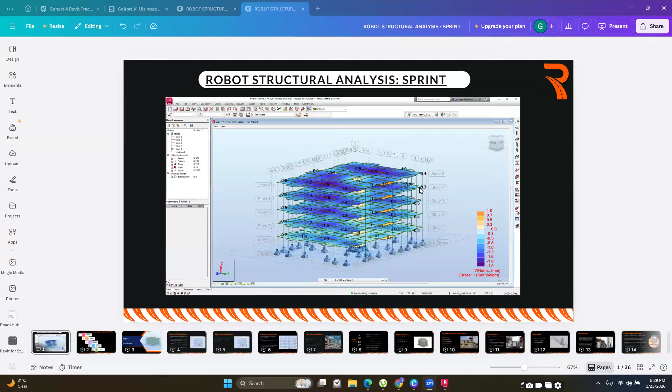So today is going to be the very first day of our sprint, and we are going to start by giving you a general flow of the sprint. We have 5 steps that we would want to cover with you. The first one is to introduce you to structural design, and for the sprint we are going to be focusing on RC design. I'm saying introduction because I'm assuming we are new to design, especially with the software. We are all new to the design, but we have some background information from our undergraduate studies.

So after the introduction, we are going to go into modeling, and in the modeling phase we are going to be majorly using the software.

From the modeling, we are going to go into loads and load combinations, then analysis and verification, and then production of design reports. For the very first 2 steps, we are going to do today. For the last 3 steps, that is 3, 4, and 5, we are going to focus on tomorrow evening. So if you're free tomorrow evening, please feel free to join us as well.

Let's get started. I will start with introducing our Robot Structural Analysis software. It's a very beautiful software, one that I've grown to love. I know most of us have probably not interacted with it, and for those who have tried to learn it on their own, may have encountered a lot of challenges with it, and most people end up not taking it up. But it's a very, very good software, and it is quite versatile. I think it's one of the most versatile tools that you're going to find out here.

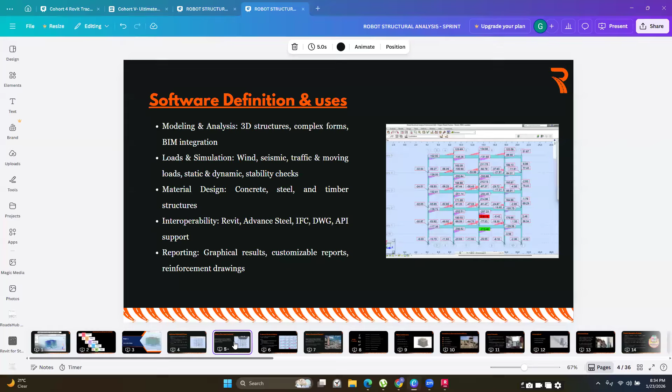So majorly that is the software, and as I said, it's very, very versatile or dynamic, and you can use it for the design of so many types of structures. After that, I'm going to go into the basics of what we are going to be doing, focusing on what we did in our undergraduate studies.

At this point, I think we are all on the same page that we are here in the sprint to design an RC structure, that is a reinforced concrete structure. The purpose of designing is so that you can get information that is going to be used in the construction phase of your structure. But even before you get to design, you need to understand what the design typically is and what the analysis is.

Analysis is what comes before design. In analysis, you are trying to predict how your structure is going to behave when it is exposed to the various loads that you anticipate it to be exposed to in the design life. So here you're talking about the loads that your structure is going to be exposed to - you have your wind loads, you have your dead loads, you have your live loads. They are all going to have an impact on your structure.

From basic physics, you know that for every action, there's always a reaction. Basically, that's what is built on before we even get to determining how the members behave. So if you have a load, you need your structure to be able to support that load, and that is what we find out in the analysis.

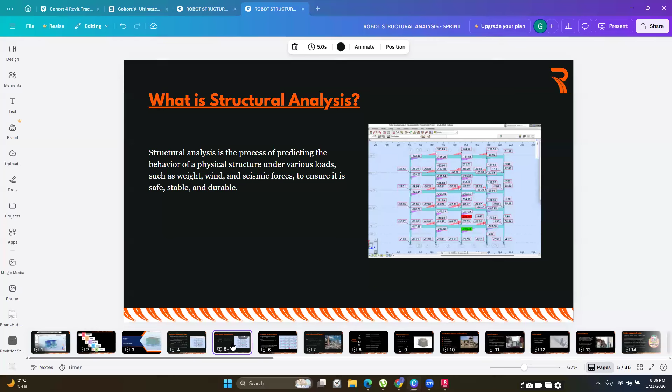So we get to find out, for the live loads that we are modeling on our structure, what moments are they going to cause? What are the shear forces that are going to be generated from those loads? Once we identify those loads and get to know how our structure behaves, we can move into the design phase. So in structural analysis, you have identified the internal forces, and you can now tell the kind of deformations and displacements that your structure is going to have.

Then from there, you can now move to design. And in design, you are going to be identifying the appropriate sizes and quantities of reinforcement. So you are going to be doing this.

So before you do your analysis, you have made a conceptual model. You say that for this span, you probably need a beam that is this deep and has this width. So in the design phase, you're making sure that cross section is actually appropriate.

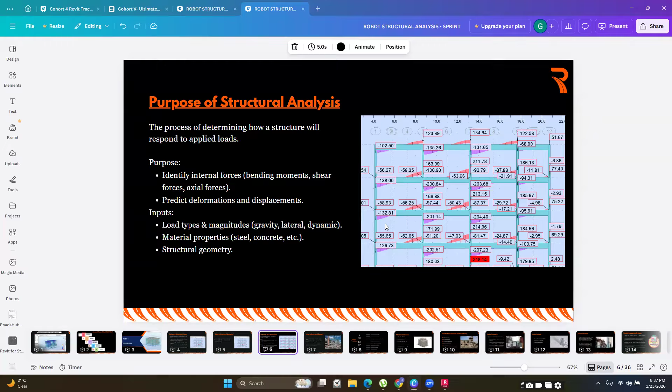And then if it is appropriate, what is the quantity of steel required for tension, for compression if it is going to face compression, and also the number of stirrups and sizes of bars required for the shear forces that arise from the structural analysis. And then it is that information from the design that is going to be used in the detailing bit of the design process.

So this is just to repeat what we have said. Structural design is the process of determining a reliable structural system, selection of suitable materials, and determination of optimum member sizes for the structure to be built. So at this point, you have done your analysis, you can quantify the internal forces, you can quantify the moments.

So at this point, you just want to know what are the optimum member sizes, what are the appropriate materials. Do you need class 25? Do you need class 30 for your concrete? This is what you get to determine in this structural design phase. And the goal of structural design is to ensure that your structure will perform satisfactorily during its design life.

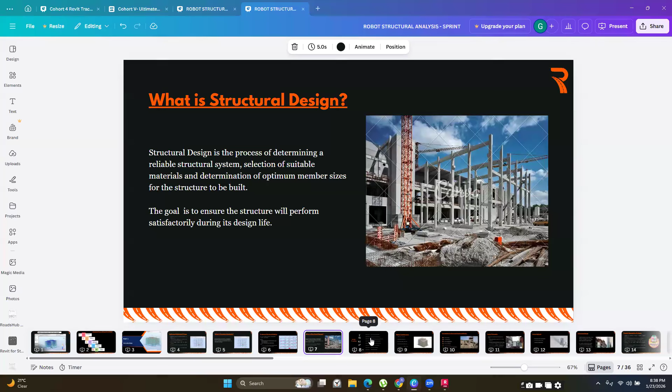But before we even talk about the design procedure, I'd like to talk a little bit about concrete. So we know reinforced concrete consists of two materials. It consists of concrete, that is the cement, the fine aggregate, and the coarse aggregate, and it also consists of steel bars. Concrete in itself is good in compressive forces, it can withstand high compressive stresses, whereas the steel bars can withstand high tensile stresses, and it is also quite ductile. So these two materials, when combined, form a very formidable building material that we call reinforced concrete.

And this, I think, is one of the most, if not the most, common building materials. It's common because of its affordability and how easy it is to use. You can see, even from the areas we stay in, there are buildings that have not been engineered and they still exist. That's how easy it is to use reinforced concrete. It's one of the easiest materials to use, and that is why it is the most common use.

So with that, we are now going to go into the design phase, and in the design we have several aims of design. Before you start any procedure, you definitely have something you are aiming for. So the whole purpose of you taking your calculator, the whole purpose of modeling the structure in a finite element analysis software is because, number one, you want to ensure that your structure is going to be safe and reliable. As the engineer, you're tasked with ensuring the structure is not going to fail under the ultimate limit loads it's going to face.

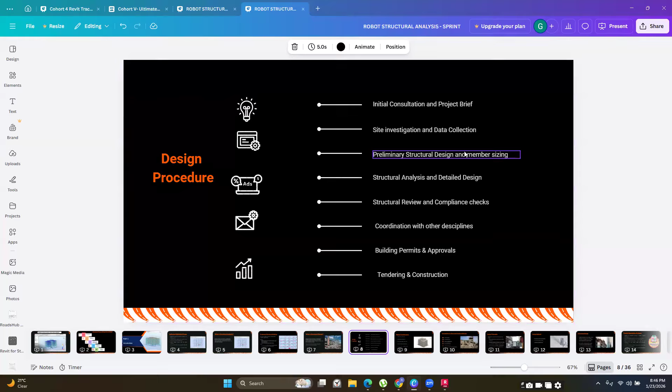From here, I'd like to go into the design procedure of how personally I approach design. This is not cast in stone, you don't have to approach it in the same manner, and it would change or alter from project to project. If you have any additions to any steps here, I'd like to see that in the chat box so we can all learn from each other. If there's something you want to add or remove, we would love to see it in the chat box. So this is how I approach structural design.

The first thing is the initial consultation with the client and project brief. Here is where you get to understand the project itself. Remember, when structures or projects are coming up, you are not working alone, you are working with other professionals such as the architects, the quantity surveyors, geotechnical engineers, and others.

So for you to get to understand the project, you have to be in communication with them. You have to get more information from them. In this initial stage, I always tell our participants, it's for you to listen, to get to understand how they intend to use the structure.

You might go to a consultation with the client with your own beliefs or how you approach your design. You are used to having buildings with permanent walls, or permanently partitioned. That is, from the architectural drawing, you know where your masonry walls are going to be placed, but from the initial consultation with a client, you get to understand that they do not want any partitions. They want just an open space.

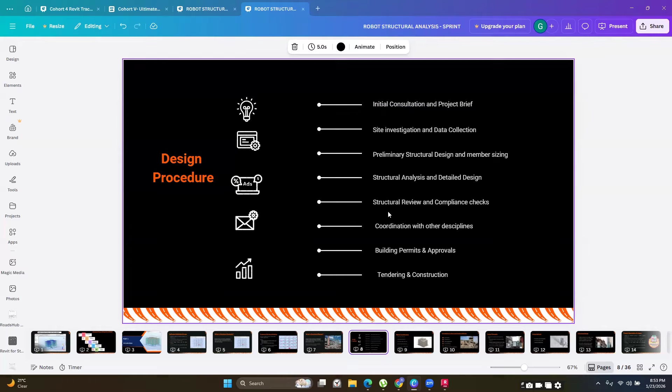So we can now move to design considerations. And what you're going to notice in the design considerations I have listed is they will majorly come from the first two stages of the procedure. So the design considerations are basically what you're going to understand from the briefing with your architect, with the client, and also from the data and investigation you did.

Some of the things you may want to consider are the structural use and function of the structure, the environmental conditions, the expected durability and fire safety, constructability and maintenance, and economic and sustainability factors.

So you can see that the structural use and function are going to affect aspects such as loading your structures. If a structure is to be categorized as a residential building, it is going to have different loads from something categorized as a commercial building.

Then the environmental conditions would affect the cover conditions for your members, and also the loads you're going to be using for simulating your winds, and also if it is in an area considered seismic. Those are some of the things you'd have to consider at this point.

Then the expected durability and fire safety. Different buildings will have different expected durability and fire safety features. So if you're doing a structure like a hospital or a school, they're going to have a higher expected durability in matters of fire safety. But if you are doing the normal residential buildings, they may have a smaller expected durability that could be even 45 minutes or an hour. So those are some of the things you have to consider.

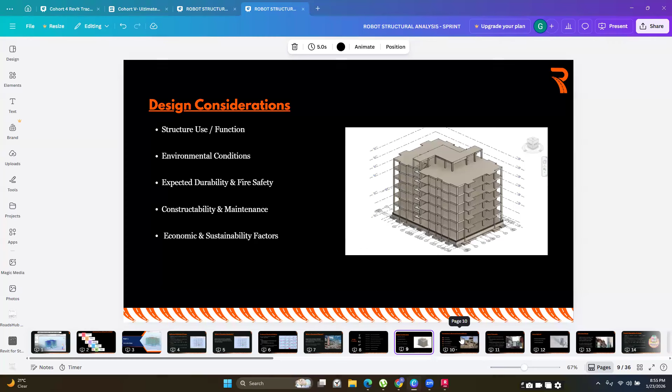And then once you have these design considerations, you can move to design itself. But as we approach design, we have to consider that there is always going to be uncertainties when it comes to design. We may, as engineers, want to be as perfect as we can, want to simulate our loads as perfectly as possible, but most of the time it is impossible to do that. And this is why we have to consider the uncertainties involved in structural analysis and design.

So these uncertainties may arise due to load variations, load distribution, analysis simplification, structural behavior, and construction errors majorly. When we talk about load variations, we are suggesting that you may consider the typical live loads that you expect certain structures to be exposed to. So if you are designing a residential building and you consider a live load of around 2 kilonewtons per meter squared, you'd be well within range. But sometimes you may find your structure exceeding those expected loads.

I think those close to the East African community remember there was a picture going around of a steel tank that had a lot of people scale it to be able to see the proceedings during the burial of the late Raila Odinga. I hope you can remember that tank or that stand. We are sure that no one had anticipated that tank would be exposed to such magnitudes, but during the analysis and design, probably the method used had some way of accounting for such an occurrence, and that's why it was able to safely withstand those loads.

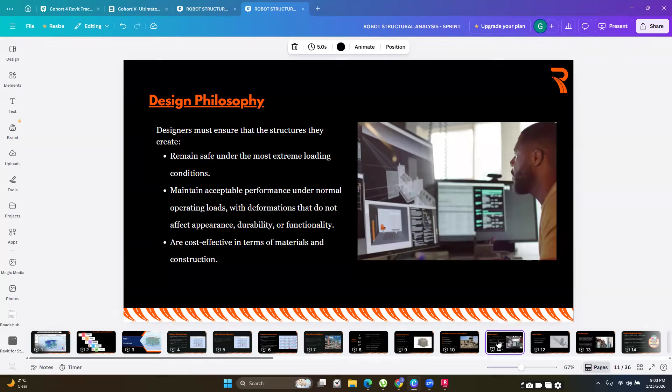Then we are going to approach the design methods, which are majorly tied to the uncertainties in structural analysis and design. So we have the permissible stress method, also called the modular or elastic method.

So in this one, how these design methods or design philosophies - they are basically fundamental sets of principles, assumptions, and approaches that guide the planning, analyzing, and design of structures. They are there to ensure that our structures are safe and durable, and they are majorly tied to the uncertainties that we are likely to face during design and construction.

So there are three main approaches that we have: the permissible stress method, the load factor method, and the limit state method.

The permissible stress method is also often referred to as the modular method or the elastic method. In this one, to cater for uncertainties, stresses acting on a structure are not allowed to exceed a certain proportion of the yield stress. The yield stress is the point at which a material stops behaving elastically - that is, an increase in strain stops causing an increase in stress in the material.

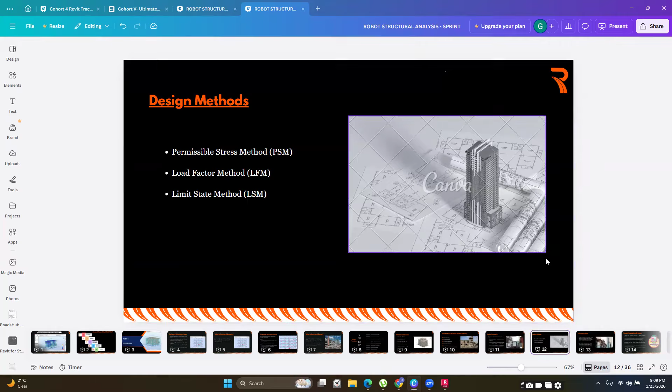Okay, so I don't want to bore you with a lot of theory. I want to move to a more practical sense, but at least now we have some background and can approach the design. So I will go to the project information and what you are going to be doing - the scope for this particular sprint.

We are going to start with interpreting the architectural drawings, covering what we had in the first stage of our design process. At this point, we are going to be concerned with understanding the architectural project and how it is going to influence where we place our structural elements.

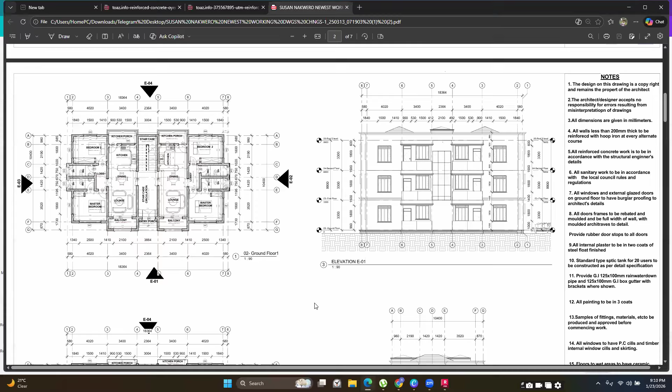So what I'm going to do is open up the architectural file on my end. I hope you can see it - if you can make out anything from my screen at this point, please type a one. If you can see the architectural file and make out the dimensions, probably how the space has been utilized, please type a one.

Super, we can see it clearly. So before I proceed, at this point we want to do our preliminary sizing and get an understanding of how we are going to approach our design.

I just want a few volunteers, probably 2 or 3. Let me hear what you understand, and from what we have here, how we should approach our column modeling and placing our beams. Okay, take it up. Anyone, whoever goes first, just to save on time.

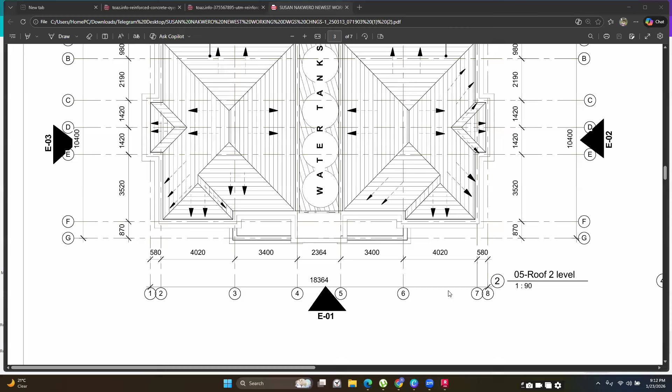Feel free to share with us, we want to hear from you. What can you see on the screen, and what do you think we should do, especially with regards to modeling our columns and placing our beams? Also consider this is a three-story structure, so have that in consideration. Let me hear what your thoughts are.

Anyone willing to go or give it a trial? Boss, please take it over. Please go.

Right, thank you so much for guiding us through this. I think at this point you want to look at the building in terms of what is the arrangement of the rooms that the architect has given you.

Look at the ground floor, then the first floor, depending on how many floors are coming on top, and see if you put a column from down, does it go through, can it be linear to the last floor up? Or at some point does it end somewhere? Also consider the arrangement of columns and beams - is there going to be a column randomly placed in the middle of a certain bedroom?

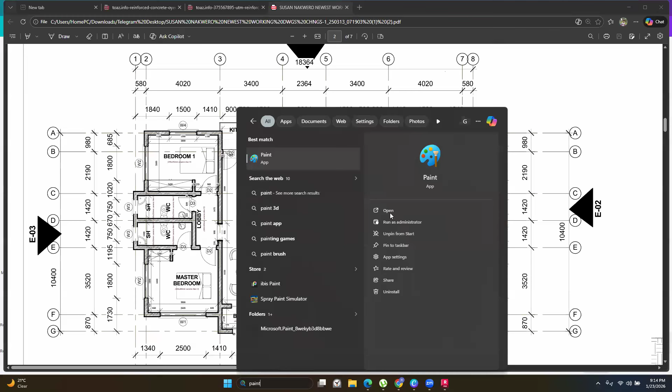Someone else, one more person, and then I'll proceed. Okay, good evening. Good evening, Bright. Yes, am I audible? Yes, you are. So for me, the way I usually approach this, the first thing I do is...

I clean my drawing using AutoCAD. I'll take the ground floor, then the first floor, then the second floor. So you superimpose the first floor on top of the ground floor, then superimpose the second floor on top of the first floor, and if there is a third floor or an eaves layout, you superimpose it on the second floor layout.

So from there, I will just take my walls - you clean out the walls and leave the openings. So when I'm modeling, I'll be looking at where I've got openings; that's where I'll be putting my beams, then checking the spacings. I then align my columns depending on the spacings that I'll be having. That's how I usually approach it.

Super, thank you. All right, thank you, that's how you're going to approach it. But in the interest of time, we're just going to use one floor to place our columns and beams, so we are going to get started.

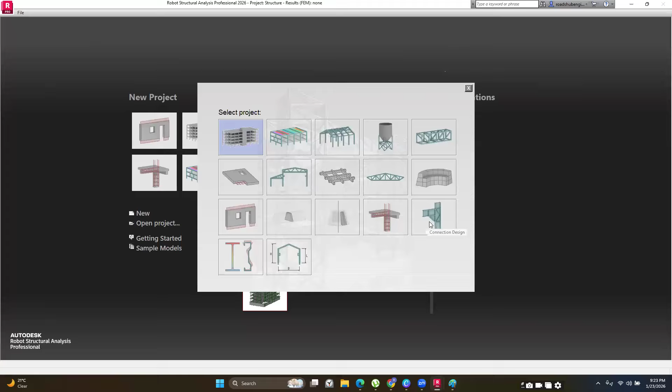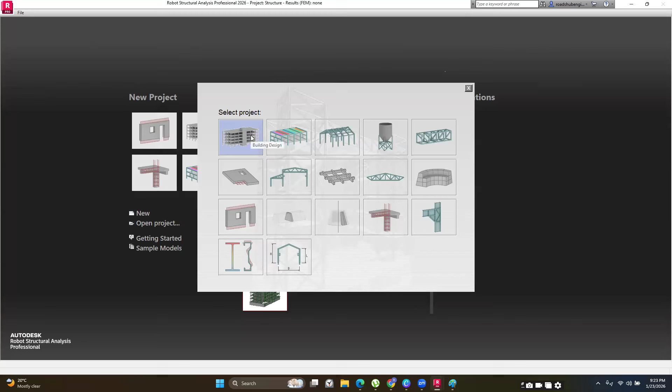So for now, we are going to be focusing on coming up with a 3D model of an RC structure. So to do that, I'm just going to click on New. Then I'm going to go with the first template. You're going to find that this is the template you're going to be majorly using. So I just click on New, then select the Building Design template.

Then once it opens up, this is how the user interface looks like. The user interface with Robot is very simple. It doesn't have a lot going on. You can see I do not have a lot of tools to go with, and you're going to realize that everything is quite accessible. All right, so this is how the user interface looks like.

At the very top, I hope you can follow my cursor. You can see the version of Robot you are using, the name of the project. So I'm meant to name it, and it has gone with the default name, that is project structure. And then on the right, after the name of the project, you can see the status of your analysis. Once you do your analysis, the status of your analysis is going to be available. But if you are yet to do your analysis, the analysis is going to be none.

And then on the right, you can see the email I've signed into the software with. And then you also have access to the Autodesk Store and Autodesk Help. Then after that, we have the ribbon.

Basically, the ribbon is the collection of the tools that you're going to be using to model your structures. When taking our participants through working with the ribbon, I always recommend don't try and cram where the tools are. Just try and understand how the software has been organized. And then as you work more with the software, you're going to just know where they are. It becomes so easy, you don't even have to think about where the tools are. So just don't focus on cramming where the tools are. Just try and understand how the user interface has been arranged.

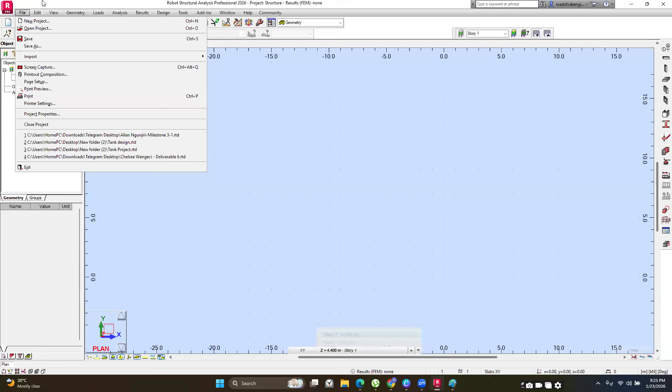So to the left, we have File. This is basically where you open a new project, where you save, etc. So this is where you have File. And then we have Edit, and Edit does what Edit essentially means — we have undo, redo. If you want to make changes to something that you've modeled, you do it in the Edit tab.

Then we have the View, and the Views basically majorly affect how you view your elements. When you are working with Robot, it's quite sensitive when you're snapping. So if you look at my screen, you can see a few dots. If you can see the dots, please type a one. So when you're working with Robot, it's always going to try and snap with these dots. And if you're not aware of that, it is going to bring on a lot of errors down the line.

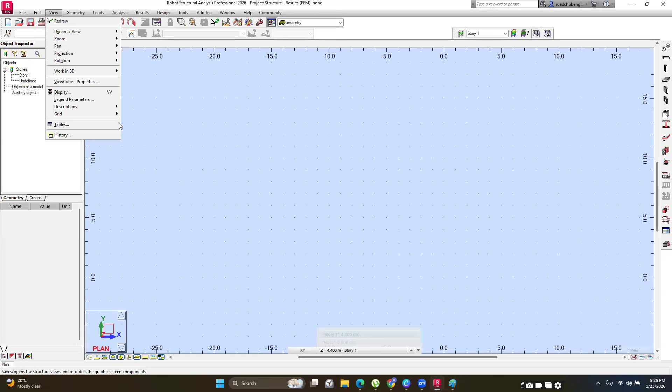You're going to be modeling your structure, and once you get to the analysis phase, you are going to find that some of your panels are overlapping, or some of the columns or beams were not snapped to the nodes that you intended them to snap to. So whenever you open up a project in Robot, I always recommend go to View and then click on Grid. Once you click on Grid, place your cursor here and scroll to turn off grid, then turn them off. Once you do that, you're going to now be in control of where the software snaps to, and it's going to help you be more accurate with your modeling.

Then now from View, we go to Geometry. In Geometry, this is the tab that we're going to be using to come up with our structure. So in the Geometry tab, we can define the structure type.

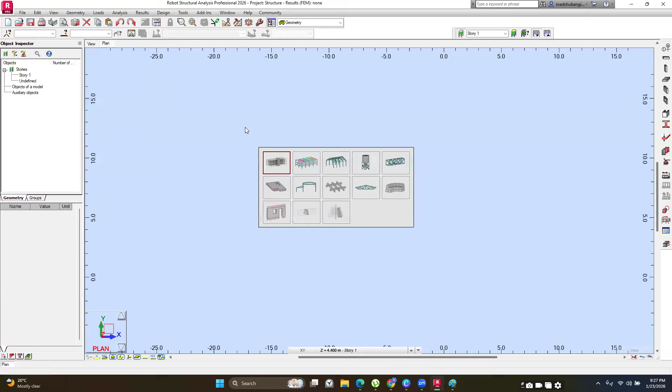Okay, so we can still access the templates from here. If we want to change, you can do it from here. But I'm going to stick with what we had earlier. I'm not going to change it. I'm going to stick with the 3D modeling.

And then after 3D modeling, you can do your axis definition. For those who are new to axes, axes are majorly just a coordinate system. I'd consider them a planar coordinate system, and they assist you in locating your structural members and communicating where they are. When working with the software, it is always easier to model where a grid is.

So when you're working with the software, even if you don't want to have a grid on your detailing, I always recommend you have the grid there and model with it. Then when it comes to the documentation bit of the design process, you can delete it. Okay, so we have that.

Then from the geometry, this is where we access the tools to model our structure. All these tools are accessible via the modeling bar on the right. You can see where I'm hovering with my cursor.

So at the top we have axis definition, and this is the very first tool I have here — it's what enables us to draw the axis. Then we have stories. To define our stories, say the story height, etc., we define it here. You can use these tools here, or access it from this bar as well.

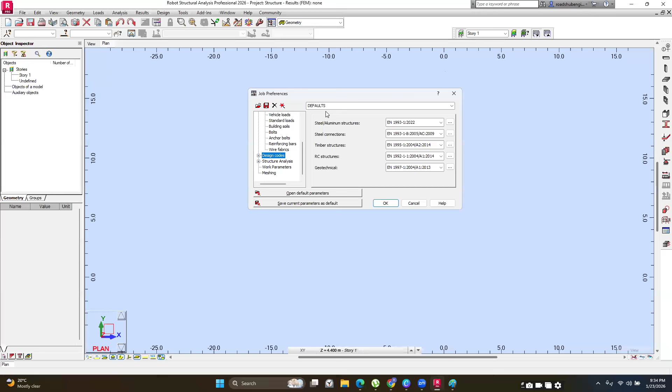Sometimes you may want to change to certain Eurocode annexes so you can design for elements such as shear walls. But since our structure doesn't have any walls, I'm just going to go with the basic Eurocodes. If you want to change them, click on the drop down, then click on more and select the type of code you need, then set it as current. But for now, the Eurocode is sufficient.

Okay, I think we've had enough with that, so we can start the modeling. To start modeling, it's really easy. Before I do that, let me confirm my story heights. I'll go to Structure, Stories, and ensure my story height is what I intend to have. Always do this before you model, because it may be troublesome to change the story height once you do.

You can see the project I had opened up - I was working on a tank, so it had a story height of 4.4 meters. I need to change back to what I expect for a residential project, working with a story height of 3 meters. To do that, it's really easy: I'll select this story and delete it, then go to define manually and change the height to 3 meters. All I need to do is type 3 meters and add it. Then once I have that, just apply.

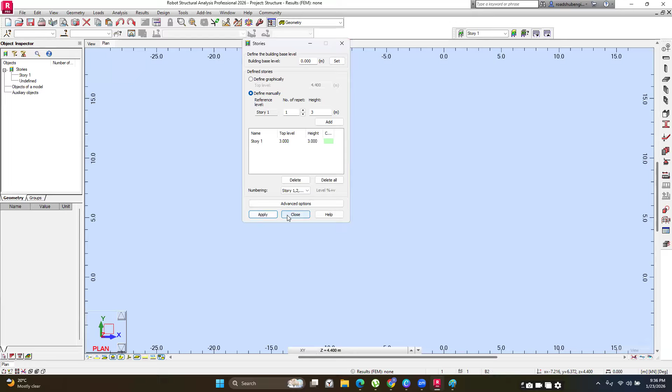This is important because when I place my columns, they're going to follow this height. If I had modeled them with the 4.4 meters, they would be placed with heights of 4.4 meters. Once I click apply and close, I'm going to have this. Then I'll scroll and ensure I'm in story 1. Once I'm here, now we can start creating our grids.

When creating our grids, we may want to follow what the architect has, try to model the grids as he has modeled. But the reality is sometimes you may need additional grids that he did not have. Here you're a bit lucky - probably the structure is quite simple and you have grids at almost every element. But in some instances, you'll find yourself working on projects where you have to introduce new grids.

So we're going to create a few grids here, and it's really easy to do. So to create grids in Robot, this is what you do.

You just go to your modeling bar on the right. You can click on the axis definition or access it by going to geometry. So you can access it either way, but using the modeling bar is easier, so I always recommend going with what is easy.

So select axis definition from here and define your axis. We have three axes: X, Y, and Z.

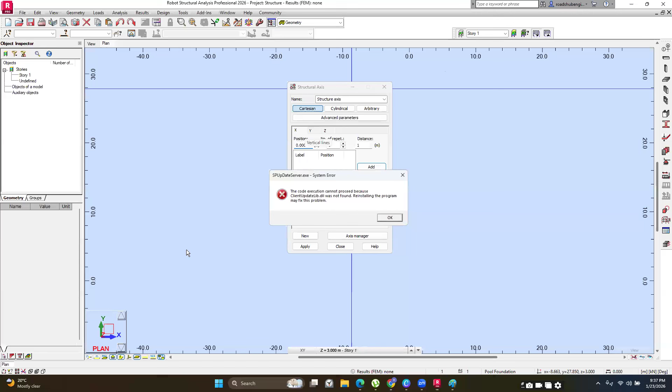If you look at my screen, you have the global axis here. You have Y in this direction and X in this direction. You can see Y is pointing upwards and X is pointing towards the right.

So this is telling you that X in Robot is from left to right, and Y is from bottom to top. So when you want to define axes that are spaced along the X direction, just ensure you're in the X direction, and then start with creating the first axis.

I'm just going to have my distance 0, number of repeats 1, and I'm going to have an axis at position 0, 0. So the position 0, 0 for me is here. This is where my grid 1 is.

Then to place my grid 2, I will enter the distance between grid 1 and grid 2. At this point, I know the distance between the two grids is 0.58 meters.

So what I will do is come here, have the number of repeats as 1, and then enter the distance. My distance here is in meters, so you need to be careful with that. If your distance is in millimeters, always ensure it is in meters.

Otherwise, you may end up modeling a structure that is more than 1,000 meters long, and it's going to give you trouble. You're going to find your members failing and not know why. It's because you are designing beams that are 580 meters long, which doesn't make sense. So always ensure you convert your measurements correctly.

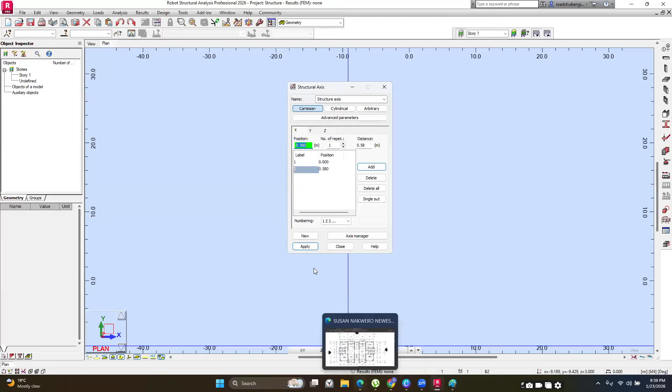So I will have my grid 2 at 0.58 meters from grid 1. Then I'll proceed to create my second grid, 4.02 meters. I just go to the software, in the distance type 4.02, and add it.

Then from there, I'll go to the next grid, that is 3.4 meters, so I'll type 3.4 meters here and add it. Then I have a second grid that is, say, 2.365. I'll type that, 2.365, and add it.

Then after that, I will go again, just reading the distance and typing them in. So I have 3.4 again, I type 3.4 and add it. Then after 3.4, I'm going to have 4.02, add it, and then finally 0.58, and add it.

So I have my grids. Once I'm done in the X direction — this is the X direction, and this is the Y — I'm going to go to my Y direction and place them.

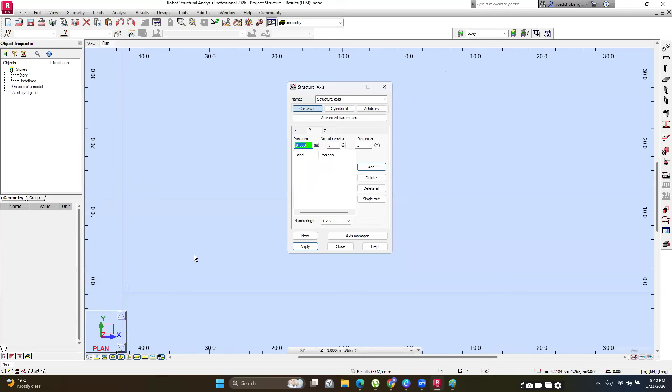My 0 is always going to be at the bottom left. You can see where my 0, 0 is, here. So I'm going to have these as distance 0 and number of repeats as 1, then add it. That is the position of my first grid.

Then I will start from the bottom, going upwards. My first grid is 0.87 meters, so I will have my distance here as 0.87 meters and click on add.

Then from there, I'm going to go to 3.52, add my distance here, 3.52, and add. Then I'm going to add the next grid, 1.42, twice. I click to add 1.42 and add it twice, one, two.

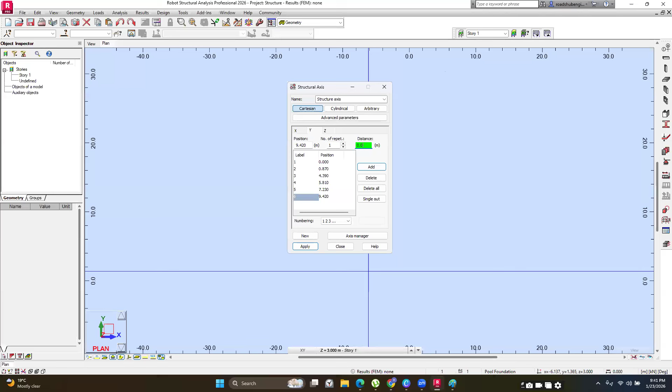Then I'm going to add the second one, 2.19, then 0.98, then add it, then apply. Once you apply, you have your grids.

Something I forgot to mention is that you can change how your grids are numbered. At the moment, you can see all my grids are in numerical figures — the grids along Y are numbered 1 to 7, and the grids numbered left to right are also numerical. Ideally, you want to have one set of grids numbered or ordered alphabetically.

So I'll change the ones along Y to the alphabetical order just to match this. This will change the numbering at the bottom where you have numbering. You can use ABC, enter values, or define them manually. I'll just go with ABC, it's easy. You can apply and close.

And then I have my grids set. So this is what we'll do. We will model columns, and I'll just start on the bottom left. For this structure, I'm just going to start with an assumption of a 200 by 450 millimeter column, and for the interior ones, I will do 200 by 500.

So what I'm going to do at this point is this: I'm just going to explain how I approach orienting the columns. I think it's something that is really important to grasp before you even start placing them.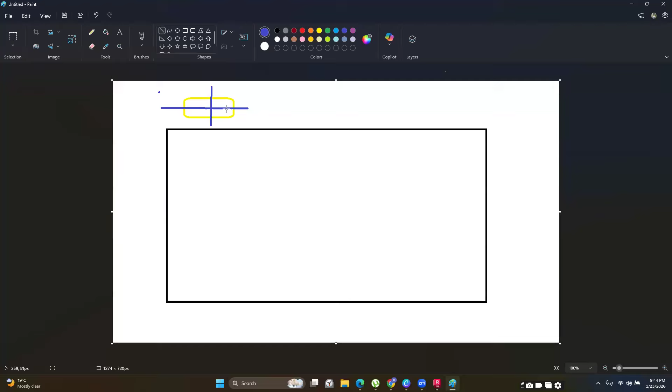So whenever you are doing your preliminary or conceptual modeling, always try to have the longer side be in the same line or parallel to the longer side, so it can ideally resist more bending in this direction. This makes your design a bit more efficient, and you end up requiring less reinforcement in this direction.

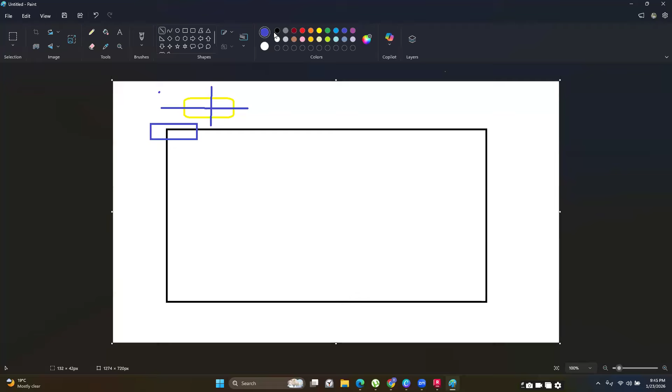This can also be influenced by how the panels have been arranged. Say you're designing for such a point - you have a beam on the left, a beam on the right, and in this direction no other beam. You may expect these 2 beams to behave like a seesaw, so the moments on this beam and this beam, if there's a support here, counteract each other, and you expect minimal net bending in this direction.

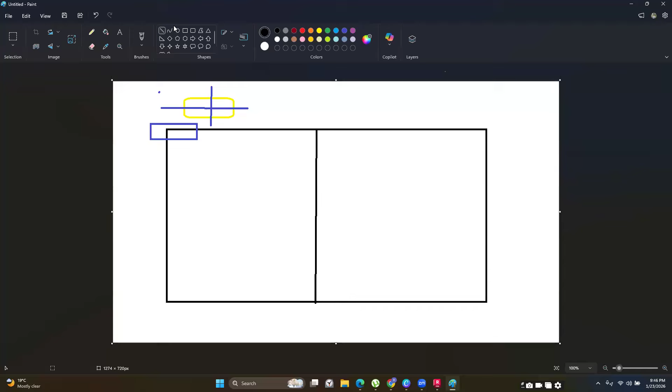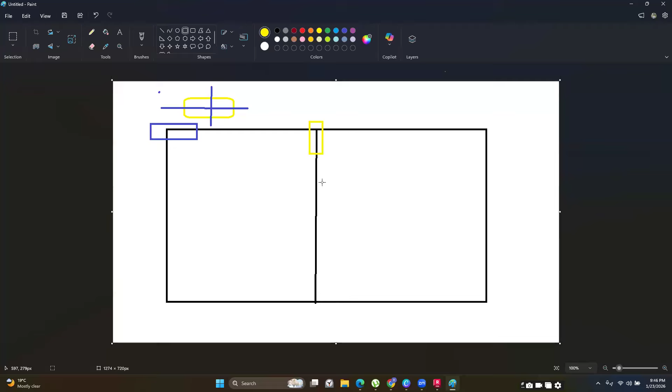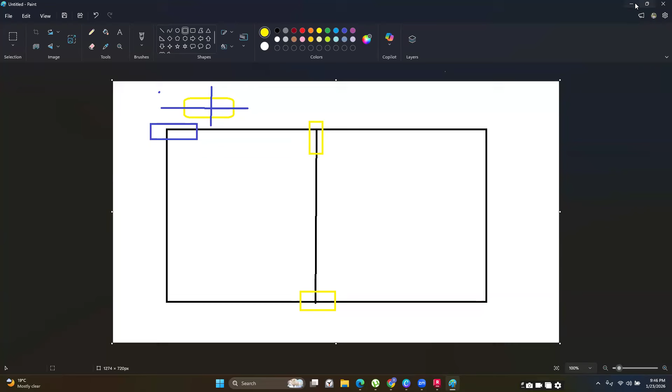So for this case, you may prefer to model your beam with the longer side in this direction. But again, this is not cast in stone - it depends on the scenarios you find yourself in. If there's a door here and a window here, you may not be free to model it this way - you're constrained by the architectural needs and usage of the structure. In that scenario, you may be forced to design it differently. Not that this is wrong, just that this method is a bit more efficient and economical in the design phase. So what we're doing here is just the conceptual design phase.

We are making educated guesses on the sizes of the columns and members we need. From there, tomorrow, we are going to do the design and get the actual sizes. So at this point, we are just doing the preliminary sizing - making an educated guess of what we need.

So we will start with the columns - it's going to be really easy modeling them. To model columns, you go to the modeling bar, and select the columns option. This is the option you select for modeling columns. You left click on the columns, and once you do this, you get this pop-up. The first thing you need to do is select the type of column you want - you can do timber columns, RC columns, or steel columns.

We are doing an RC structure, so I'll go with RC column. Then click on these three dots to define the type of section you need, and give it a label or the name.

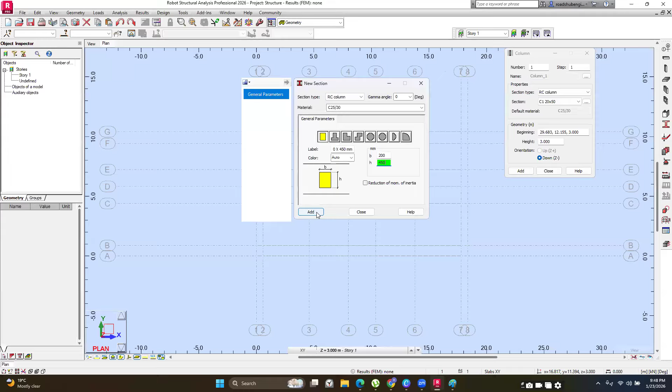I'm going to call it column 1, 200 by 450 millimeters. So in the width, 200, and in the height or depth of the column, 450 millimeters. Then I will click on add and close.

Once I do that, I will just place my columns. So in this panel here, what's the distance here? I expect this is the longer side, so I'll just orient it in this direction here.

Let me look at where this is. This is a second grid, I will place it here. Once I place it here, you're going to notice that my column has not been oriented in the direction I wished for.

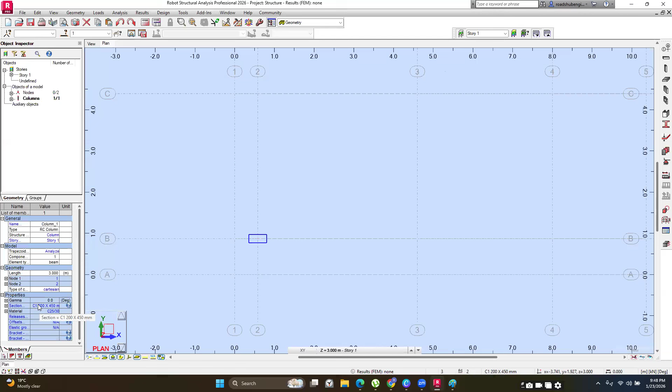So to change the orientation of a column, you just select it, and in the options on the bottom left you can change its orientation. You go to Properties, expand Gamma, and type the degree of rotation, then click somewhere and it's going to be oriented. And that's how you model it.

Once you're done with the first column, you can copy it or model the others. So I'll quickly model the others. For these ones, I will orient them in this direction. I'll place another one here and another one at grid C.

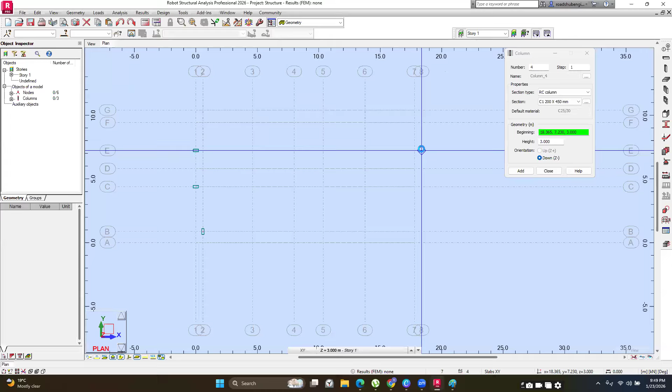It's really easy. You just go to column modeling, then you place it. You place the first one here and the second one here, then I'll do the same thing here and here because they are modeled in the same way.

Just to save on time, I will copy this one. To copy in Robot, you just go to this option here, Edit, and select Copy. So highlight the item you want to copy, then go to Edit and click on Copy.

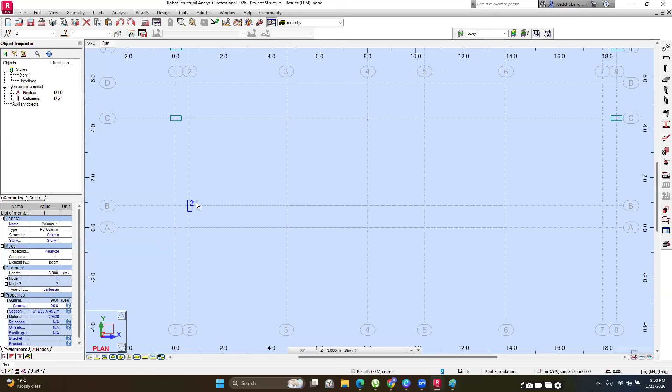Let me go to copy here. So this pop-up appears and then I can copy it. All I need to do is left click on the center of the column and copy it to these other points that I need to place it at. So it's here and it's here.

Okay, so if you look at my structure, there is some form of symmetry, so that's why it's easy to copy the columns to the other ends. All right, so I'll proceed to place the other ones.

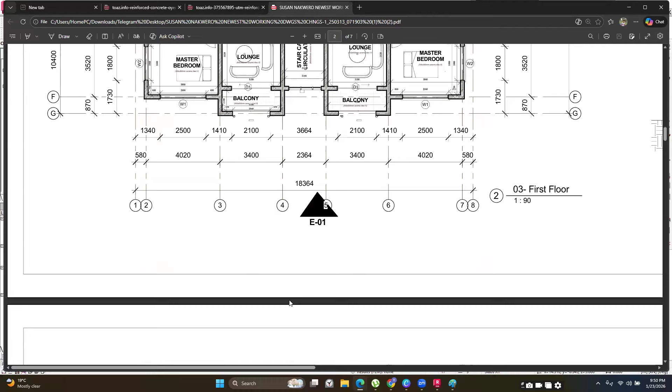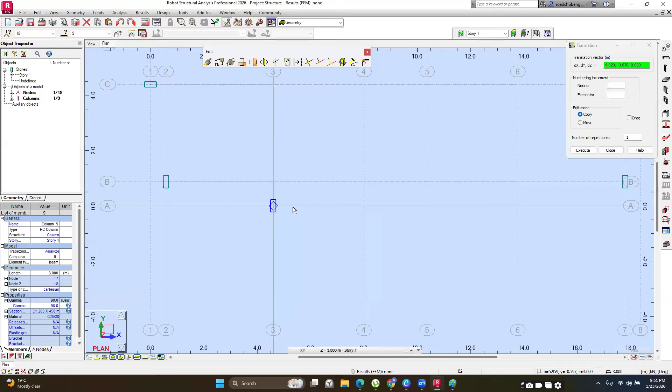I will copy this one. Again, to copy this is how you do it. You select the column, then you go to edit here, it looks like a square rule, so you just click on it. Then you click on the second option, move stroke copy. Then all you need to do is left click on the center and place it at the points you want to copy it to.

Okay, and this will be a bit easy for us to do. You can close that once you're done. Then to copy them to the other end, it will follow the basic principle, you could just copy them.

So to make it easy, and also to demonstrate how you can easily copy, I will just highlight them, left clicking and holding my left cursor. Once they are highlighted, I'm going to click on move stroke copy, and copy them from this end to this other end, and close.

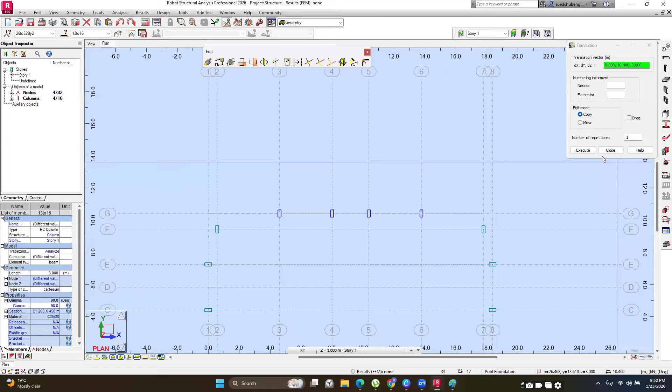And now I have at least most of the columns that I need. Then from here, I will proceed to model the others.

So here you can look at what I was saying. You may want to orient your columns in this direction because these beams may seem to counter each other, but the reality is you may not want to have them go into the kitchen or in this space here. So you may just choose to align them along the wall, and then you'll end up with members that you can easily hide within the architectural components.

So for these columns, I will just orient them in this direction here. I'll place a column along grid E and along grid C, at this point and at this point. So I'll select this column here, go to move stroke copy, and copy them from this center here, click here, then from here to here.

To make this simple, I'll just highlight them and copy them from here to here, and from here to here. So I'm just following the architectural file and placing columns where I deem necessary, basically at the grid intersections of my major beams.

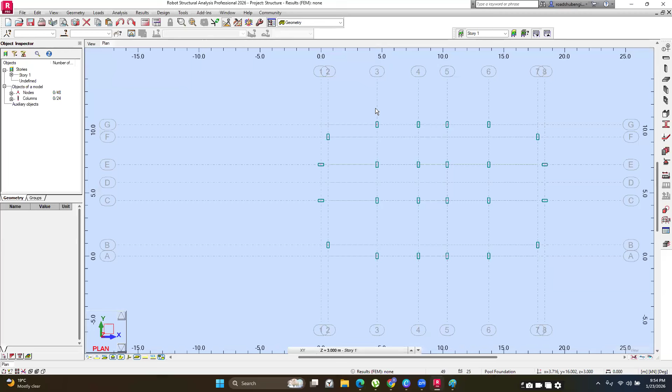So I'll proceed to model the beams for this floor, and it's going to be really easy. To model beams, you go with the beams option right here, click on beams, and just as we did for columns, you select the type of material you need. At this point, I'm only doing RC beams, so I'm going to select an RC beam.

After you select an RC beam, you're going to define the section. I'll click on this dropdown and define a section. I'm going to work with a 450 millimeter beam because that's the minimum dimension you can work with, at least for these types of projects - a 200 by 450 millimeter deep beam. If during analysis and design we need a larger beam, we'll do that, but for now I'll work with 200 by 450 as a preliminary size. I'll add it and close.

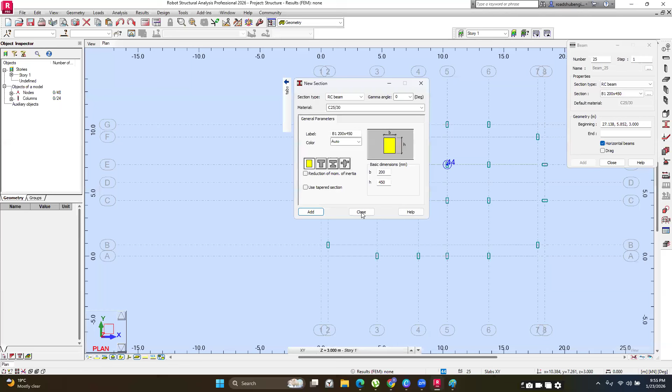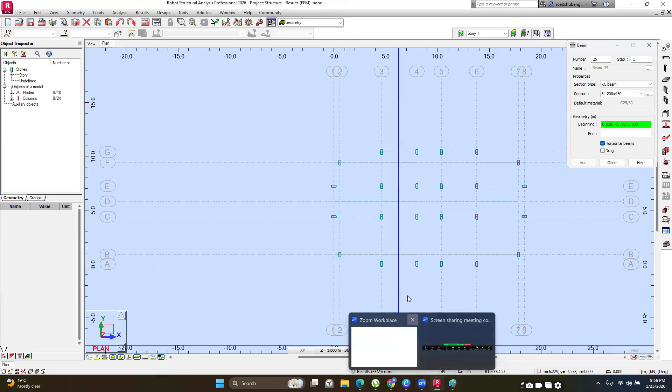Once I do that, I'm going to start modeling. When it comes to beams, it's important to understand we have majorly two types: secondary beams and primary beams. Primary beams are directly connected to the columns and transfer loads to the columns directly. Secondary beams transfer loading to other beams or to a beam and a column. When modeling, I always recommend you start with primary beams and then proceed to secondary beams. So I'm going to start with my primary beams, modeling beams connecting to my columns.

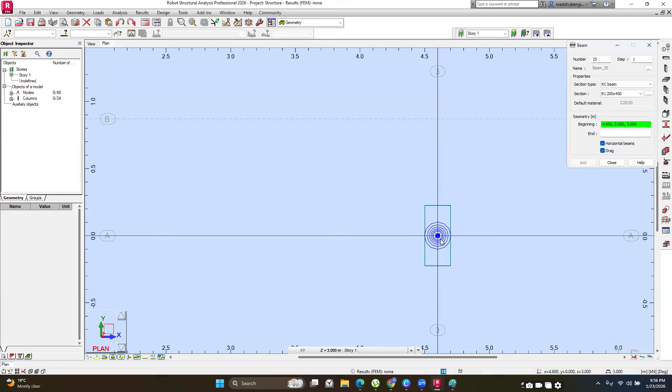If you look at our file here, we have these major walls, so I'm going to start connecting these columns. I'll go to the software and check drag so I can drag from one element to another and place my first beams. I'll just proceed to place them - it's relatively easy to do. And with that, you have the beams that you need.

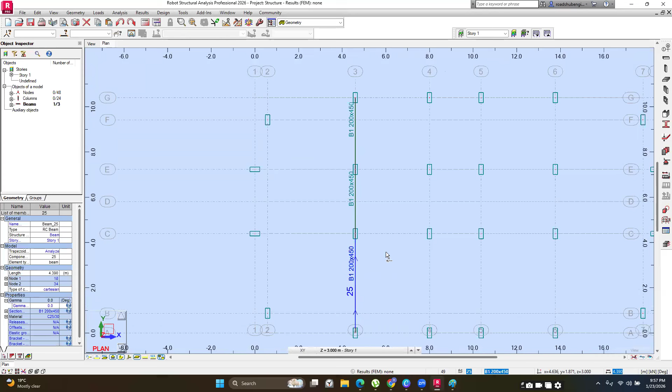After you've modeled the first set of beams, you can make your work easier by copying the beams that are similar. So you can say this beam is going to be the same here, the same here, the same here. To do that, all you need to do is select these beams - left click on the first one, then press Control and left click on the others.

Once you do that, you need to copy them. To copy them, you go to the Edit tool, click on Move or Copy, then click on this intersection and proceed to copy them to the other positions that are similar. Okay, so let me do that.

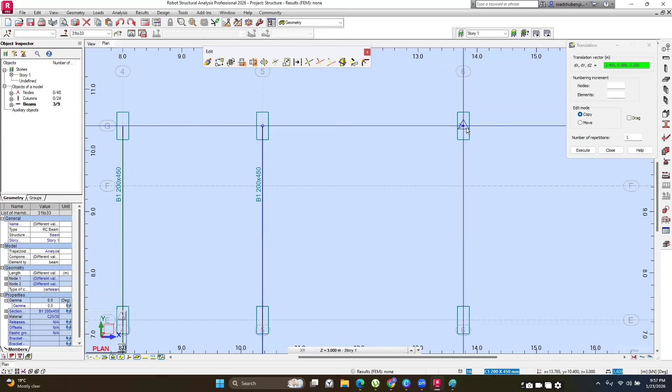Okay, so then click there and there. Once you do that, you have at least those beams in these directions. As I said earlier, I like to start with my primary beams—those being supported by columns. So I'll do that, then finish off with the other beams. The reason is so that your loads are decomposed as you wish, transferred from the beams to the columns.

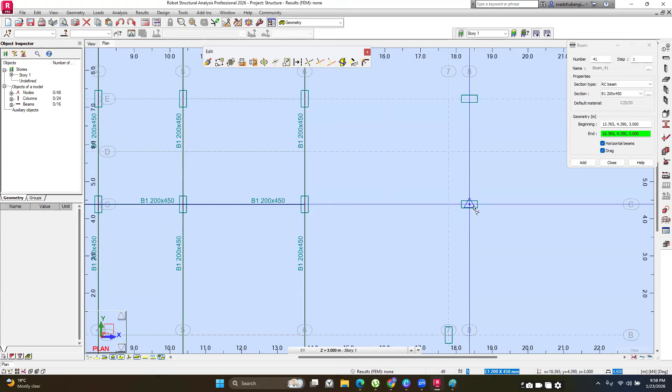If you start with the secondary beams, you may not have the load distribution method you intend. You don't want your primary beams transmitting loads to secondary beams. So you want to ensure loads are transferred whenever possible to beams that directly transfer loads to columns. Modeling in Robot is quite easy once you get the basics.

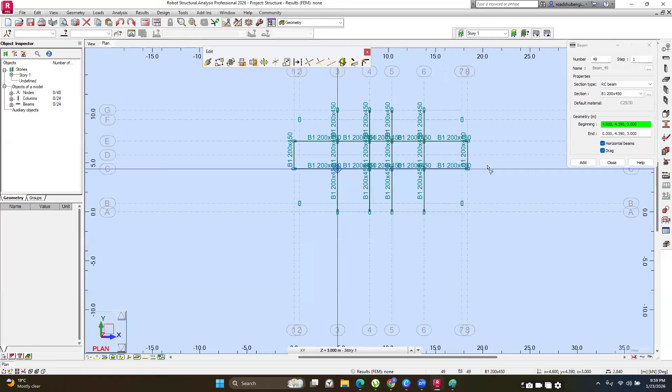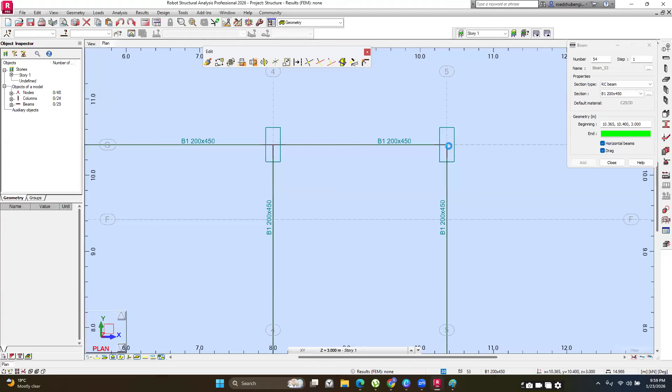So now I have my major beams, I can do this set here, proceed to do this here, and then I have that. Then here at the top, I will place them. And we are good to go. So we majorly have the major beams that we need. I'll proceed to create the secondary ones—those supported by columns and beams, and others completely supported by other beams.

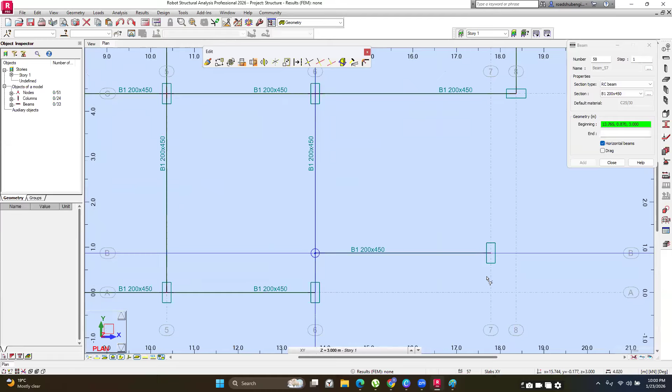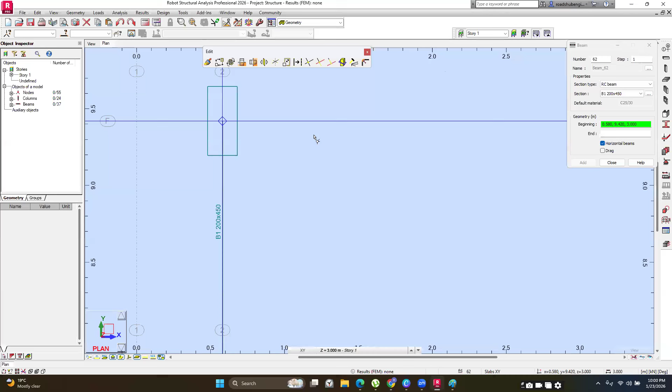To do that, I'll just click on beams here, then place them—clicking on these grid intersections. I'll do this here, and place them there, then proceed to do this here. I'll do the same thing here, and the same thing here, and the same thing on this other end. Then from this end, I'll place them in this direction. With that, I have majorly all the beams that I need.

I want to do two things here, and I want you to acknowledge this so you may notice the difference tomorrow. When it comes to partition walls—minor walls used to partition, say, the WC areas or washrooms—sometimes you may want to load the slabs directly for ease of construction, and sometimes you may want to model beams instead. That just depends on the engineer: some will design the slabs to carry the partition walls, while others will model the beam.

I want to show you both approaches. So on the right, I'm going to model the beams, and on the left, for this panel, we are going to model the slab to carry this load. I'll start with modeling the beam, then we'll model the slabs.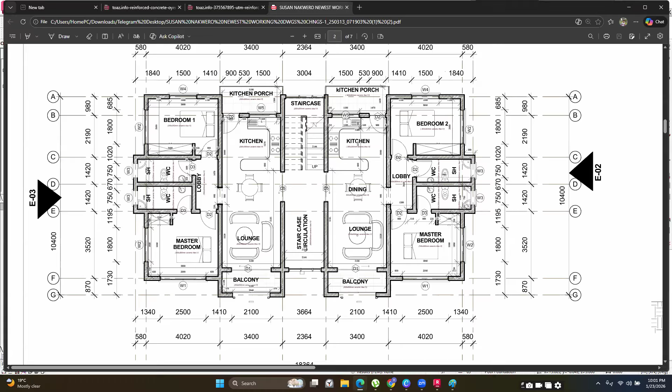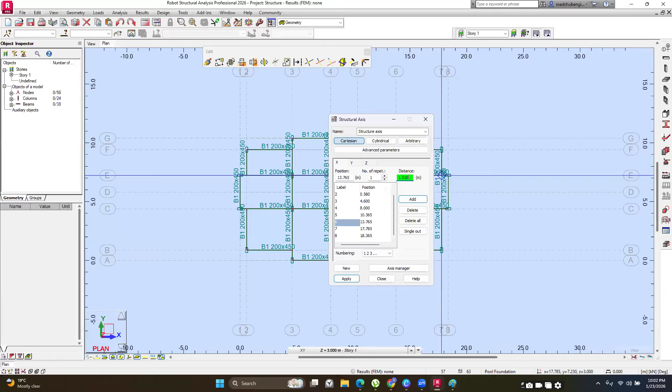To do that, I think I may need another grid here. From this grid to where this grid is, it's around 1310 millimeters. So I'll track my grid 6, go to my axis definition, and along the X where I have grid 6, click on it to set it as the active grid. Then increase the number of repeats to 1 and set the distance as 1.310. Add the grid, apply and close, and we'll have another grid here.

I use this to model my beams. You'll notice one thing: I always start with the shorter grid, the shorter beam, then the longer one. The reason is simple—designing for the shorter beam, you get less moments compared to the longer one. If I started with the longer one, it would be majorly like a cantilevered beam from this end to this end, which would give you difficulties designing for them. So it's more efficient to first model the shorter beam, then carry the longer secondary beam with the shorter beam.

So you have your major beams. From here, I want to model the slabs. Let me see—can I continue to around 10:15? We'll just finish modeling the slabs and we'll proceed from tomorrow. Type A1 if that's okay, type A1 if you're still here, so that you can just proceed to model the slabs.

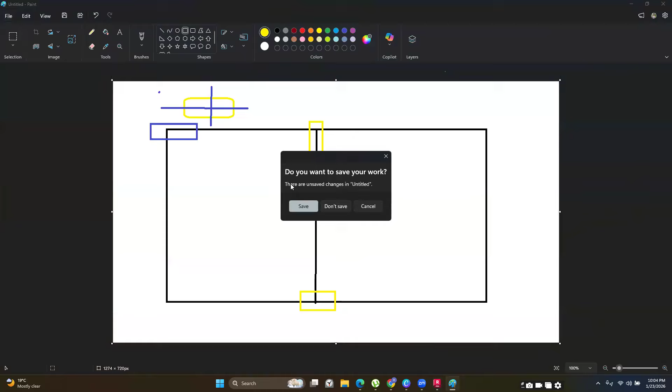Work in one direction, maintain one direction of modeling. So if you choose to model from left to right, that is, you have your first click here, then your second one here, and your final one here, stick with that. Because the direction you choose first is going to be your major axis for the design of slabs.

So the slabs themselves have something we call the local axis, and this is going to be the X, and this is going to be the Y. The local axis affects how you interpret your results. It affects how you understand them. If you end up mixing them, understanding and interpreting your results may become a little bit difficult. So for efficient and easy use of the software, I recommend you maintain one direction of modeling.

So this is what I'll do. I recommend you go left to right, then bottom. This is what I mean. So when you go to slabs, this is where you model, this is where the tool to model slabs is.

Left click on the slab tool here, and then in the thickness, just click on this drop down, define the thickness, give it a name. So I will call this 150 millimeter RC slab. Then you define the thickness here, so this will be 150, and then you define the material here, so this will be class C25/30. Then I'll click on add and close.

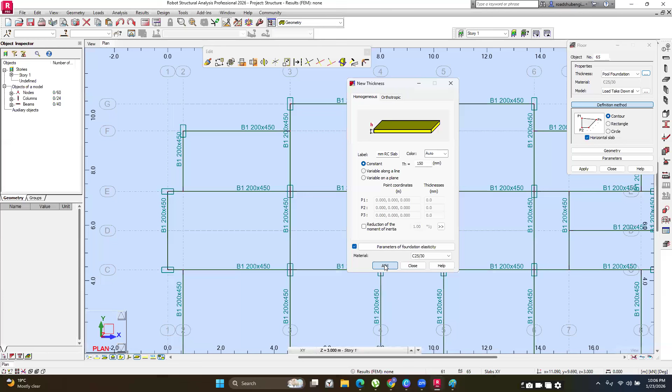Then it has been added, so I just need to click on this drop down and select the thickness I added. Then we have the model, and the model affects how the software, or how Robot, analyzes your slab. Because Robot is a finite element analysis software, it has to break down your slab into small finite elements so that it can design them. So for you to enable Robot to do that, you have to select shell.

So for you to be able to see the results from your analysis for the slab, you have to select shell. And then, for ease of modeling, always go with rectangle. It's a bit easier. Always go with rectangle, it's a bit easier to do.

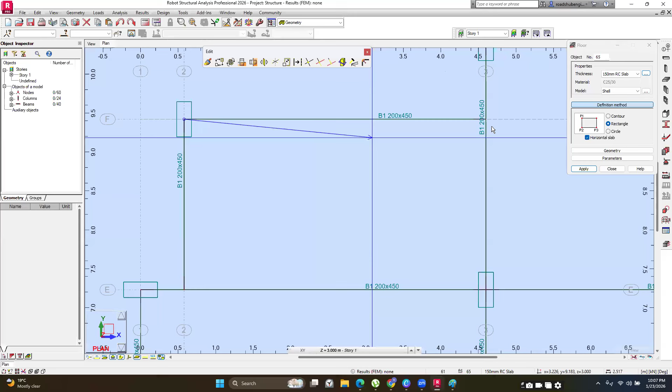Once you have that, just click on the points that you want to model your slabs at. So you just go from left to right, and then to the final one here. You go from left to right for all the panels. It may take a bit of time, but it's easier to do.

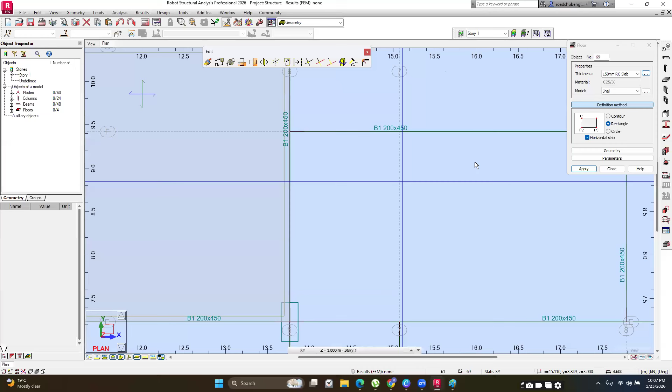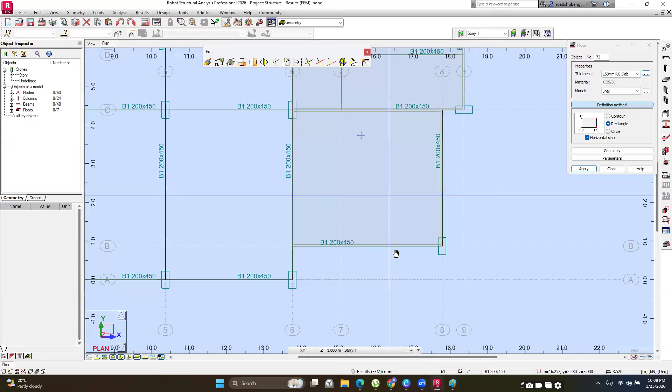So for all the panels, just go from left to right and then to the bottom. Left to right and then to the bottom. I realize I covered the space where we have our staircase with a panel, so I'll just delete that one later on, and we're going to model our staircase tomorrow. So for this one, I'll just place it here. Notice I'm staying consistent, left to right, and then bottom. So just stay consistent with this.

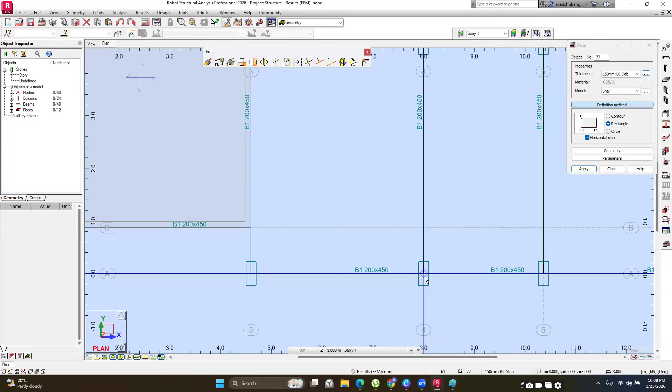So I recommend, whenever you're using a software, just understand how it works, how it approaches things, so that you don't end up fighting with it a lot. Some softwares you'll end up fighting because you want it to work the way you want, but it has a very specific way of doing things. Always try to research online, read the manuals from Autodesk. If you're using Prota, go through the manual from Prota and understand how it works. It will make your work easy because you won't end up having to fight with the software all the time. Once you understand it, it becomes a bit easier to use.

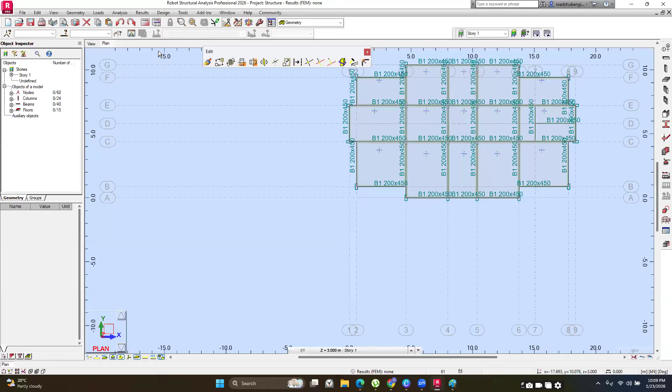Okay, I was missing that one. And then finally, with that, we have our slab, our structure rather, modeled. That's how you model your structure. That's how you basically come up with a structure in Robot.

And then in tomorrow's class, we are going to copy this structure upwards, and we are going to start with modeling the staircase, and then copying it upwards, and then loading it and designing it.